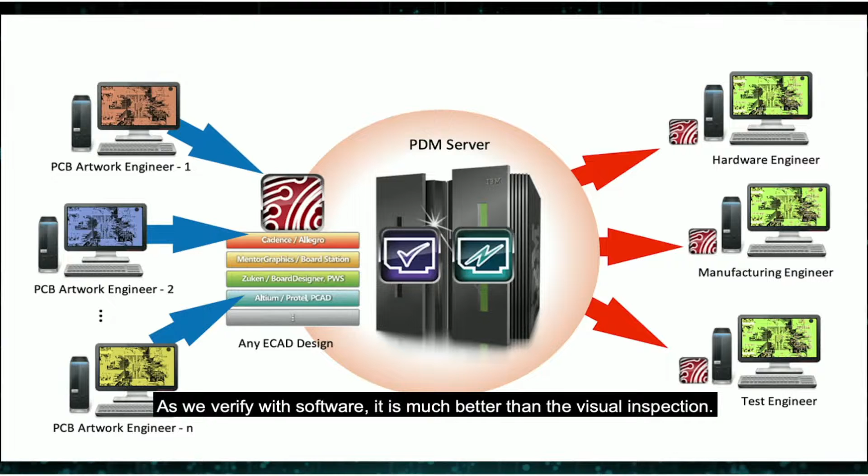그러다 보니까 재설계를 할 필요가 상당 부분 줄었고, 그 다음에 재제작까지 이루어지는 분야를 사전에 차단할 수 있어가지고 사실 개발 기간 그리고 제작비 거기에 효과를 많이 보고 있습니다.

빠른 대응, 그러니까 저희가 요구하는 아이템을 적기적소에 바로 제공해 줄 수 있고 저희가 요구하는 대로 수정해 줄 수 있고 그런 부분이 영향을 받았습니다.

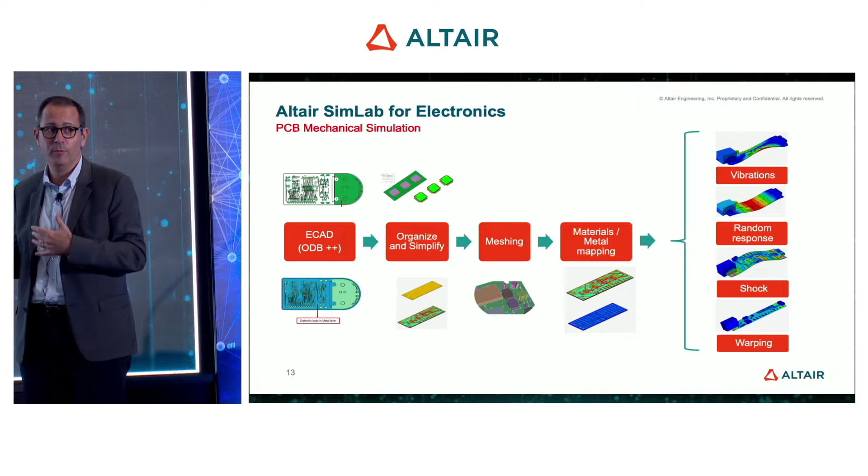But it's not only for the mechanical simulation. In SimLab for electronics, we can also do the system thermal analysis and the electronics thermal management, including external heating, component heating, and joule heating.

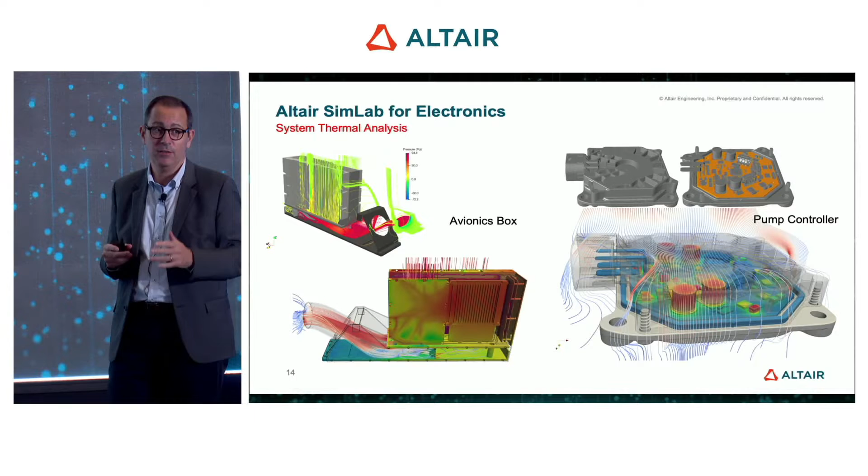And now we jump to the electrical engineers who are working on the design of the antennas, analyzing which is the best place to mount the antennas, also working on the simulation of a drive test or a flight test, working to analyze and mitigate interferences in electric vehicles, or analyzing the communication range in a system. There are also civilian and military organizations working on the management of the frequency spectrum.

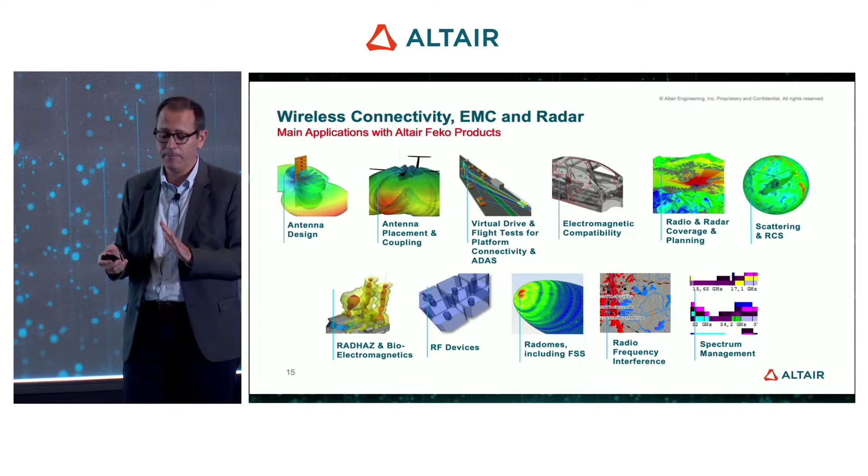From these applications, I would like to recall this use case related to antenna design and placement for Airbus, where basically they are using our simulation technology to ensure the antennas are sitting in the right positions, taking into account nearby equipment, but also constraints, for example, like maintenance.

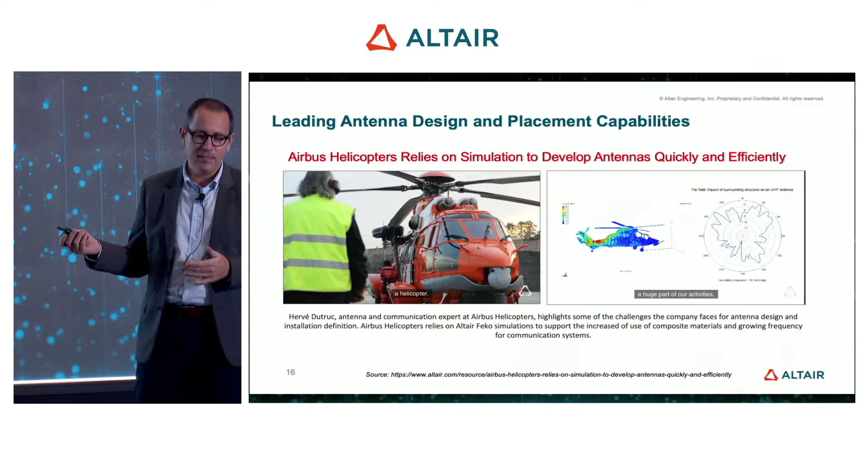And this is a very nice case, but now what's next with this? Here I would like to briefly talk about digital twins related to wireless connectivity, where the digital twin is helping to make decisions during the development phase, to optimize the product during its operation, and also to collect data that will be used afterwards to improve the product.

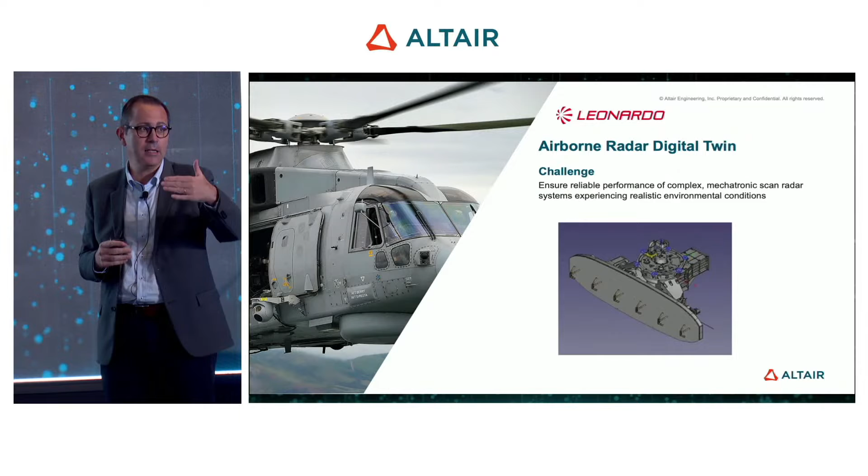And their goal is to ensure it will have a reliable performance. To do that, they need a digital twin, which emulates the real operation of the radar antenna when flying. And to do that, basically there are two parts.

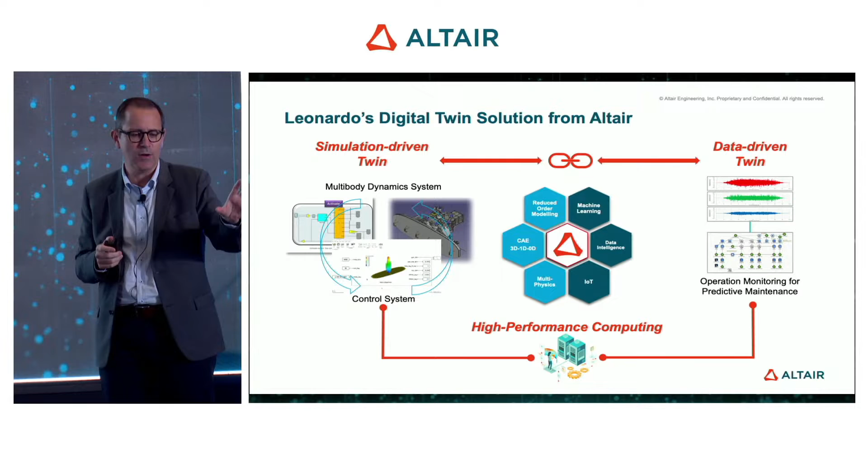And in order to do that, you really need a high-fidelity model where you need to include different physics with the different simulation tools that we have for antenna simulation, control, for electric motors, and for multi-body, to improve the performance of the product.

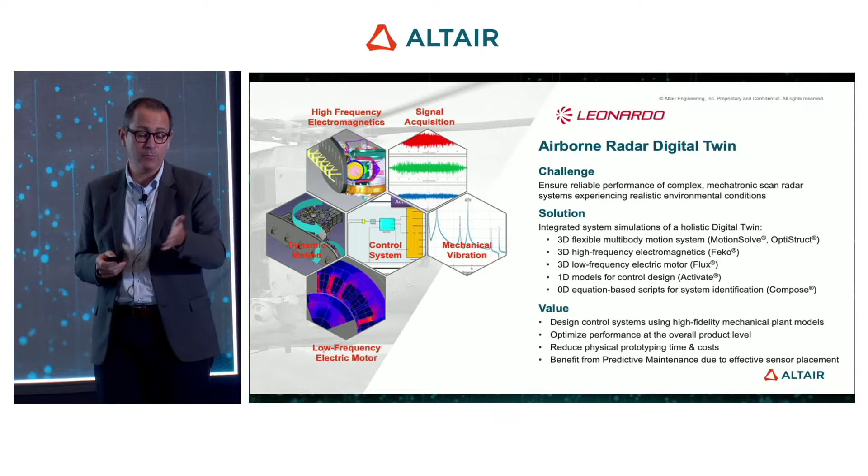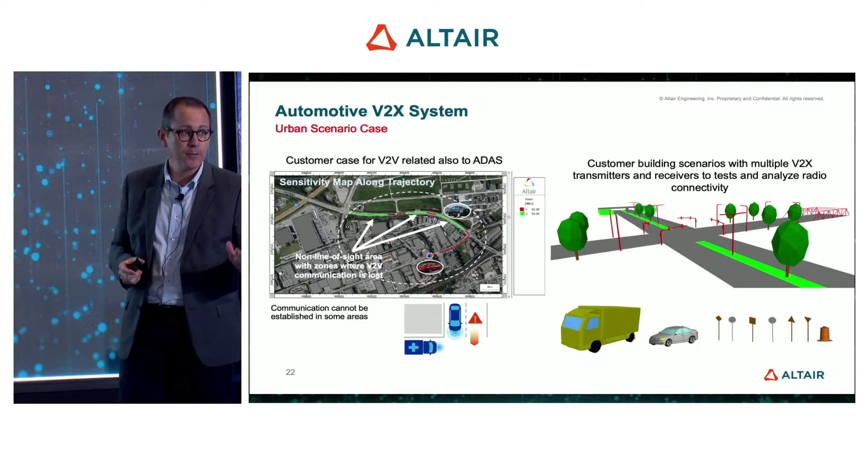And at the end, this is helping them to reduce the time they need to do all the prototyping and also the costs. And also, if we move to digital twins for automotive, we have many customers using our technologies

to analyze the connectivity between vehicles or between vehicles and infrastructure. And also this is related to ADAS and 5G, because for example, there is an interesting use case where you have cars approaching an intersection, and you need to ensure that they will communicate with each other to eventually slow down or stop the car.

And on the right, you can see something that we are now working on with several customers who want to create, with our technology, a digital twin of the scenarios that they are using to do this type of tests to communicate the vehicle with each other and also with the infrastructure.

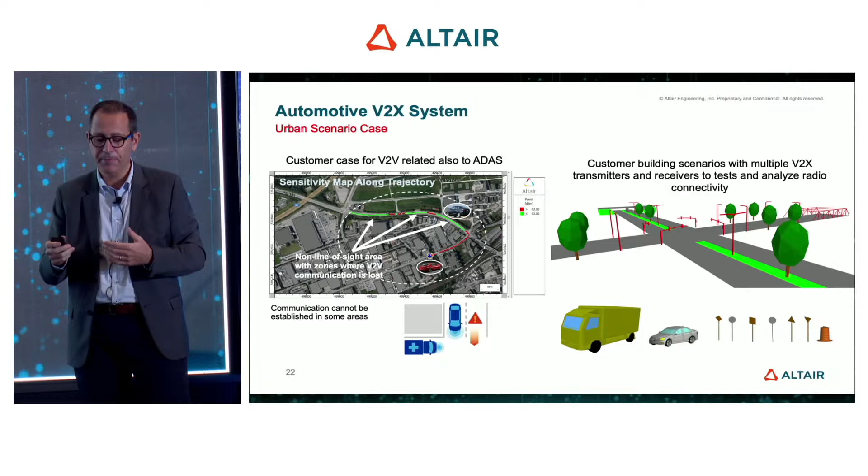And now I would like to jump to the last part of the presentation, where I would like to talk about the two most recent acquisitions. One is related to power electronics, because basically today modern electronics means power electronics and power converters. For example, you have to charge the battery, you need to convert AC to DC, or for example, for an electric vehicle, you need to convert DC to a three-phase AC, so for the electric motor. This is a sector which is growing, and it's a key part of electrification.

And this is one of the reasons why we acquired PowerSim out of the US earlier this year. Their flagship tool is PSIM, one of the leaders in the market, mainly for electric and industrial drives, used in automotive, aerospace, energy, and some others. And with this, we have been able to really strengthen the solution we have for electrification, which includes lightweighting, battery design, and also power electronics.

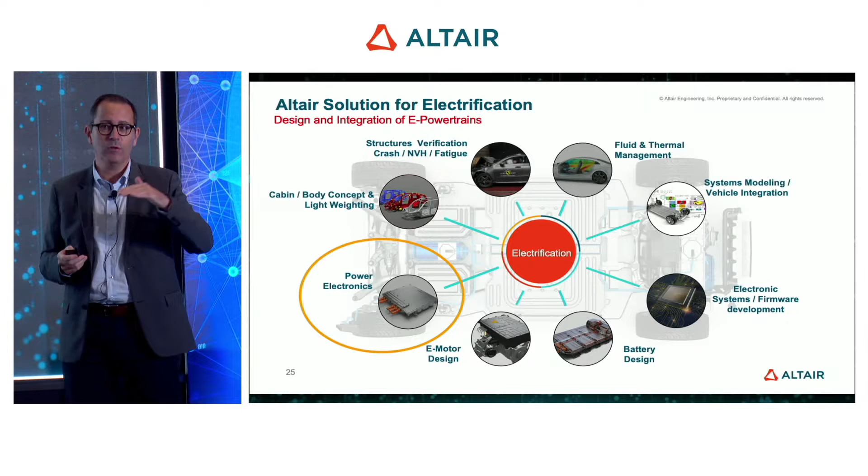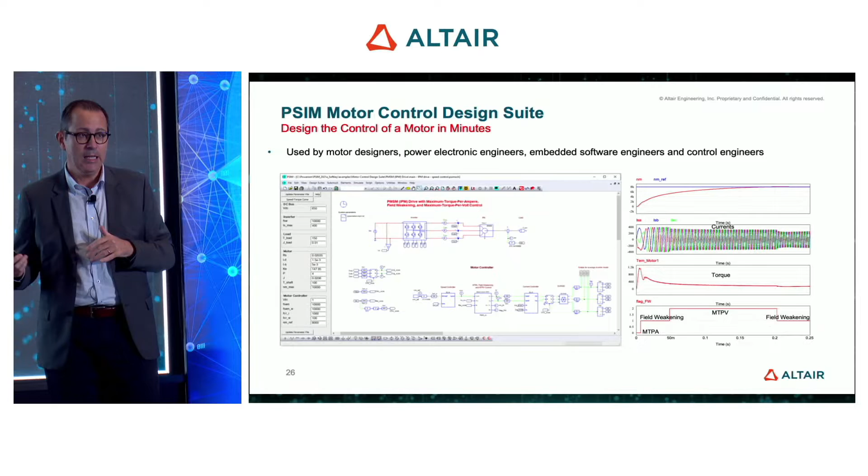And a bit more in detail, just to show you a couple of use cases. With PSIM, you can design the control of a motor in minutes, so it's really fast. This is used by the motor designers, the power electronic engineers working on the inverter, which is the device doing the power conversion, and also used by the embedded software engineers and control engineers. Eaton is one of the customers using PSIM to analyze the interactions between the devices and the motor as a part of the electric system.

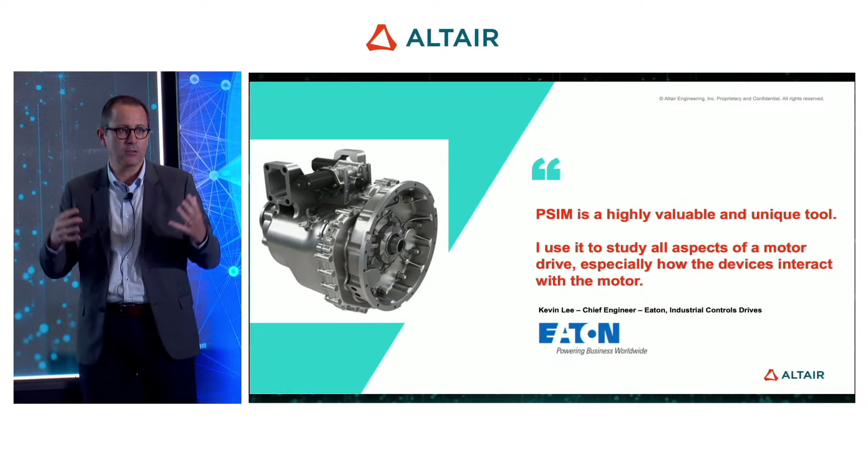And another use case is the creation of a system model of the whole powertrain of either the hybrid vehicle or the electric vehicle to analyze the system, and also where you can do some detailed design of some parts of the system, like, for example, with the electric motor.

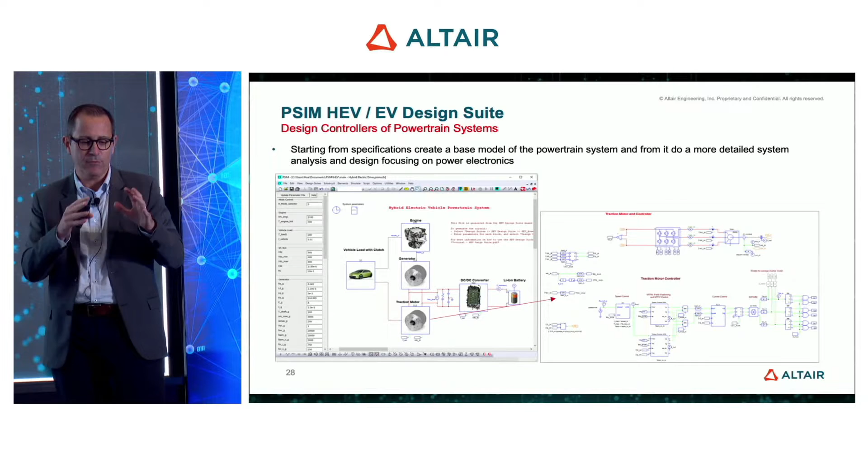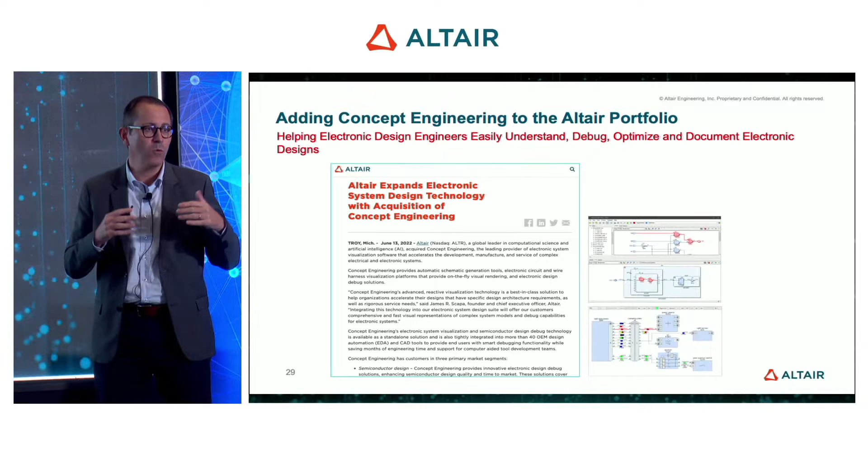And just the most recent acquisition is Concept Engineering. This is basically a company out of Germany with technology for visualization and debugging.

They are playing in 3 sectors: semiconductors, basically for silicon debugging, so to help with chip design. Also, they have a set of libraries to automatically generate schematics, and this is used by some EDA and CAD software vendors. And the last one is a visualization platform for complex electric systems.

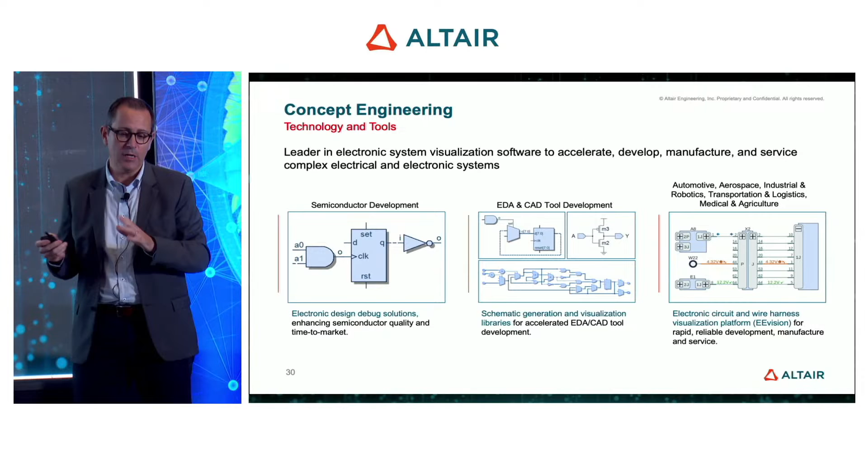This is called EEvision, where basically the idea is engineers and technicians are wasting many hours looking at and trying to find information in static documents. And with EEvision, they have now an online visualization and debugging platform where to quickly render cable harnesses, circuit schematics, and component attributes to enable a smart design exploration and documentation.

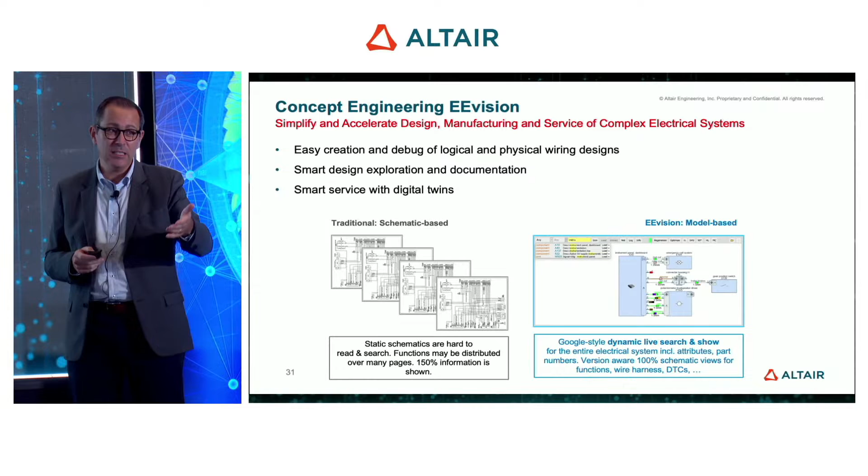And there are many companies from the transportation industry using the solution. One of them is NASA in the US, where basically they have replaced their manually created schematics, which they are also maintaining with EEvision, to reduce time for testing, design, and manufacturing. And also with EEvision, they have been able to have a faster and more reliable development process for these complex electronic systems.

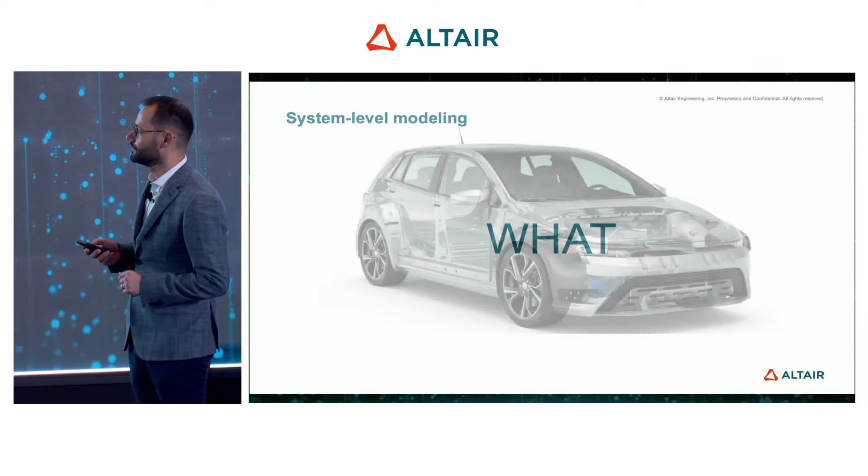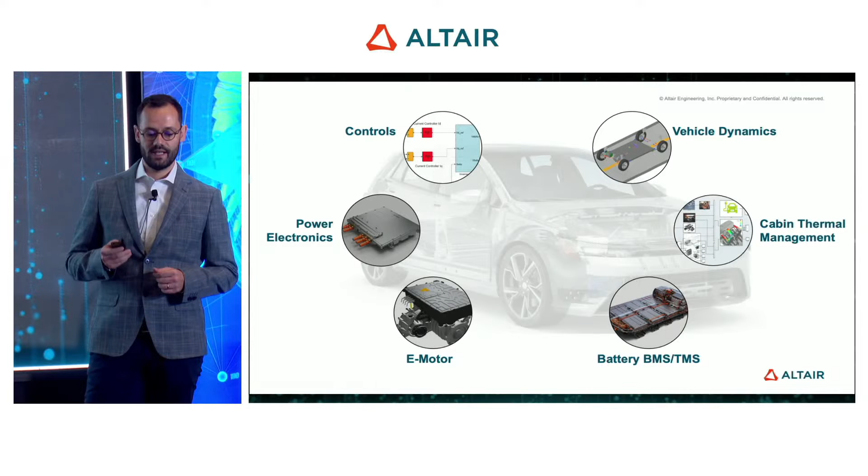Let's make an example. Let's consider an electric car. If we consider this complex system, we can identify different disciplines that are coupled together and interact: the control part, vehicle dynamics, cabin thermal management for passenger comfort, battery, BMS, TMS, e-motor, power electronics, and so on. With system modeling, we're able to model all these disciplines and also their interaction in the same modeling environment.

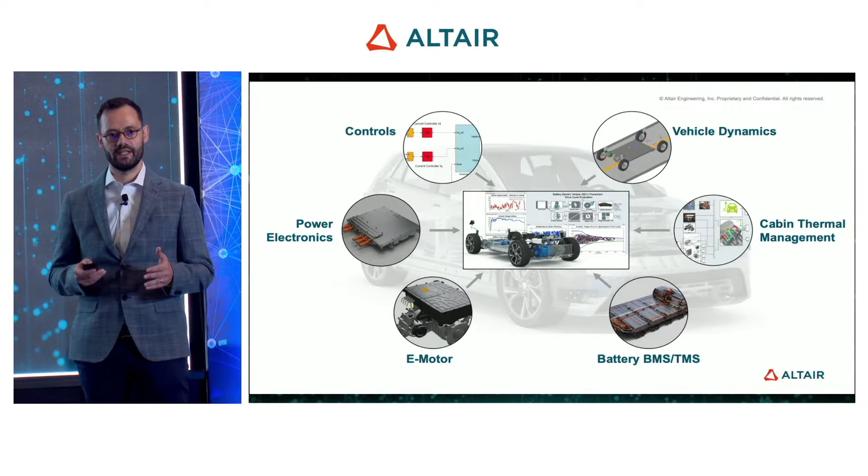Now, a good question is why we want to do that. There are three main reasons: one connected to the complexity of the problem, another connected to efficiency, and a third connected to collaboration.

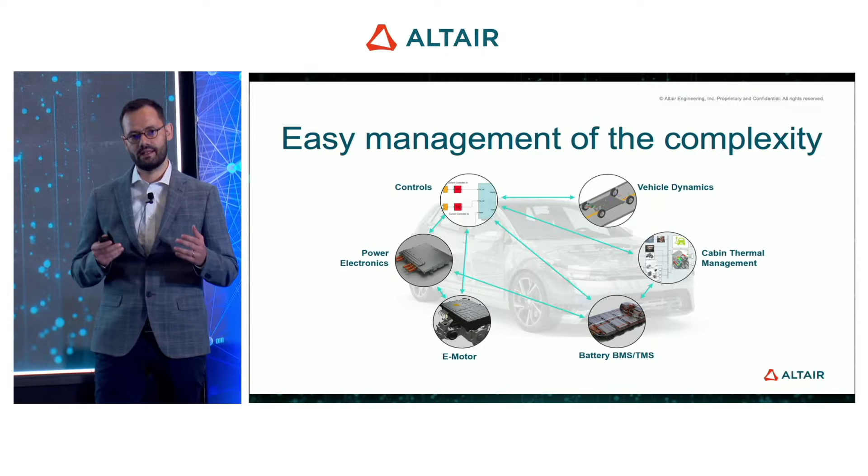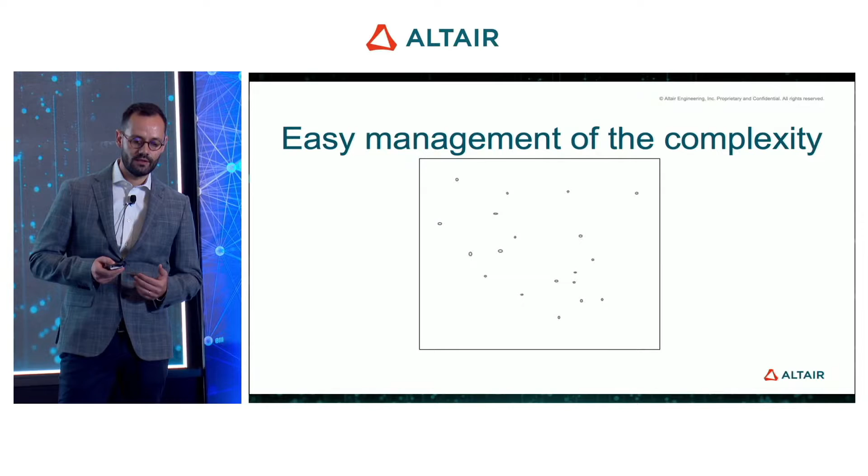Let's start with the first. System modeling helps to have an easy management of complexity, meaning we're able to handle the different disciplines and their interaction. This is very important because in a fuzzy situation where we have different disciplines, thanks to system modeling we can find the interaction among them, understanding better how our system made of different subsystems is organized. This allows a comprehensive understanding of the full system.

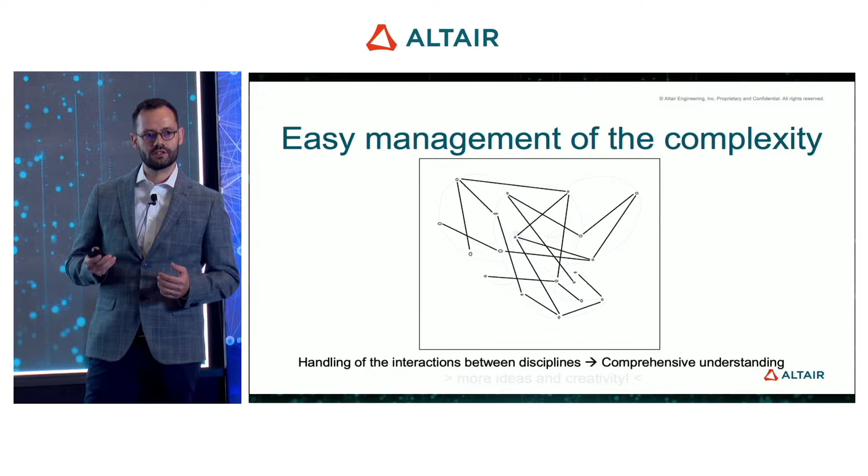This means also understanding the factors that are mostly affecting our phenomena. Why is this important? Because it can enable and help generate more ideas, and also help have more creativity. I have found my own Ganesh winking at me in the dots, okay? But maybe this is too much creativity.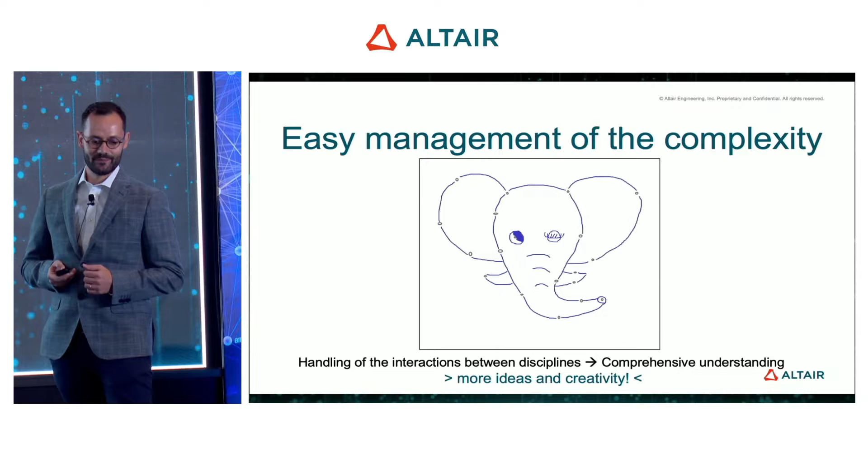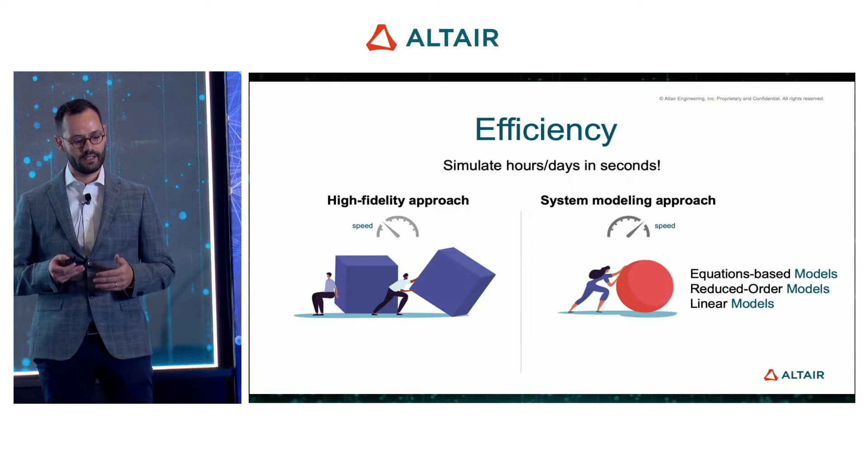Now let's switch to the other topic, efficiency. With system modeling, we can simulate hours or days in seconds. This is because system modeling usually uses equation-based models, reduced order models, or linear models. To dive a bit more into the math, with high-fidelity models we deal with finite element tools, so we need to solve partial differential equations. While with system modeling simulation, we need to solve ordinary differential equations or differential algebraic equations, which are much easier and faster to solve.

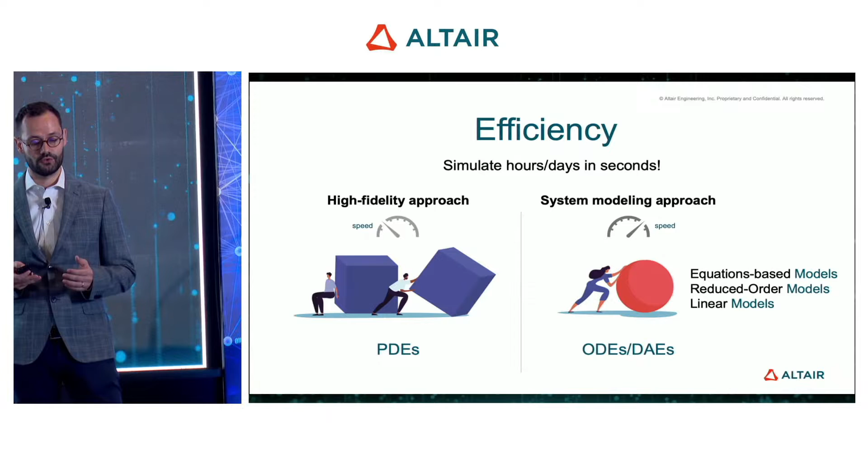The other main reason system modeling is important is connected to collaboration. As I explained, system modeling helps model each discipline and their interaction. Each discipline means different departments inside the company take care of these disciplines, and because we're able to model the interaction, we're able to break the silos in our organization. This enables a more integrated ecosystem environment, not just in terms of modeling, but also in terms of teams working on these different subsystems. This is very important and convenient.

Now, how can we adopt this kind of approach? Let me share a classification connected to the type of language we use in system modeling. We're able to apply this approach by leveraging the script-based approach, the block-based approach (the graphical approach), and the 3D approach, which is able to consider accurate geometry, the CAD system of our system. There is a language that is more suited for specific disciplines.

Let's think about control, for instance - in that case we need to use a block-based approach. But the capability to have all these languages available is really convenient when we want to use a purpose-driven modeling approach, because with this capability we can model different disciplines with different levels of fidelity.

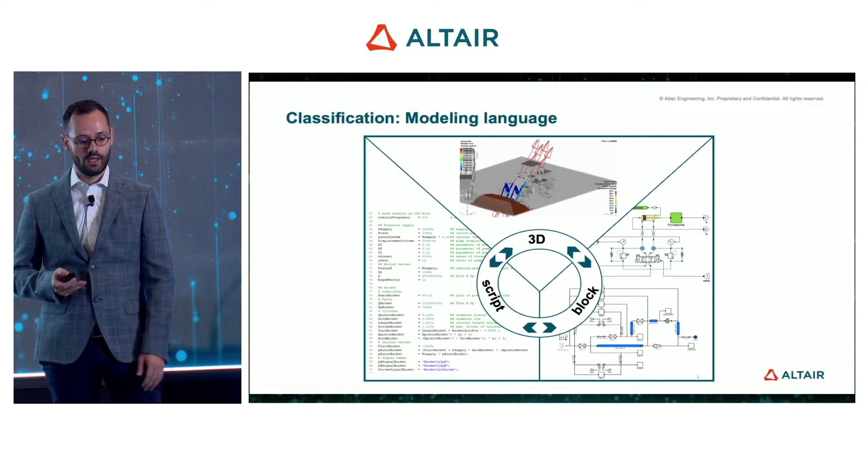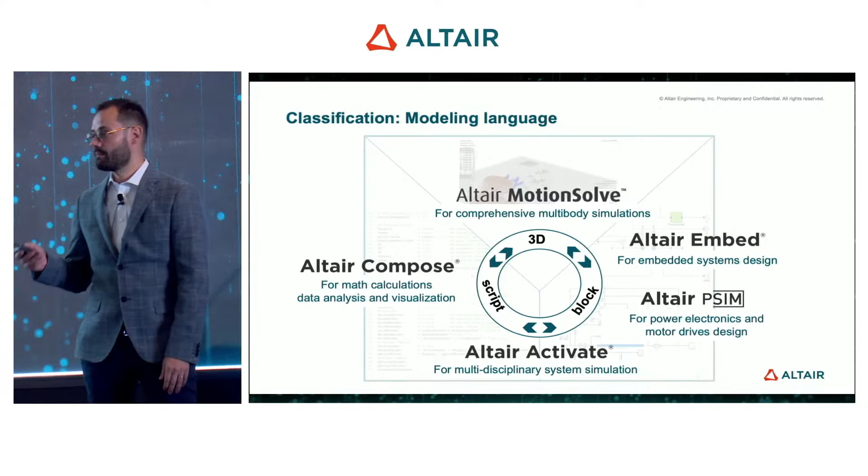Let's think about multi-body simulation, for instance. I can start with equations using the scripting approach, then proceed with a block-based approach using Modelica, and then even consider the CAD geometry of the system with all the flexibilities in the different components. So we can have a really advanced simulation. In Altair, we have many tools that take care of this language in the system modeling portfolio we offer, represented here in a circle because they are all integrated.

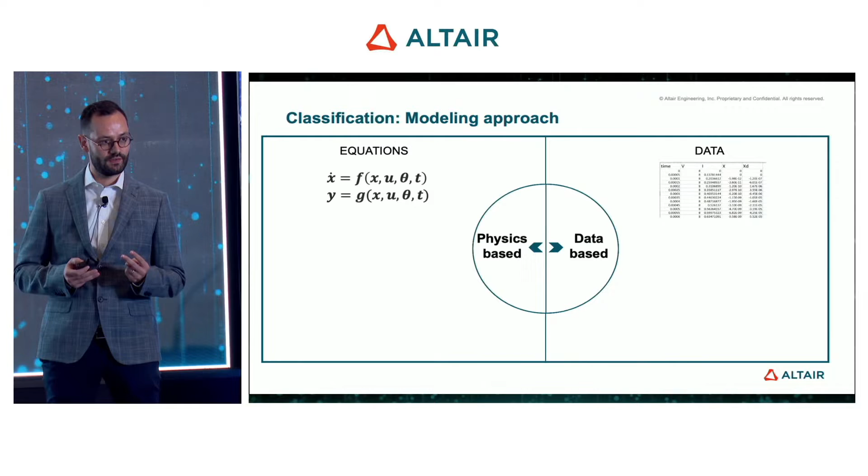Let's classify system modeling considering the approach that we use. There are two main types of system modeling approach: the physics-based and the data-based approach. The physics-based approach relies on equations. The data-based approach relies on data.

In the equations-based approach, we need to deal with the equations, so basically we use a white box approach. In the data-based approach, instead, we apply machine learning in order to identify the relation that we have among the data, so to find a model able to represent the behavior hidden in the data. This is a black box approach.

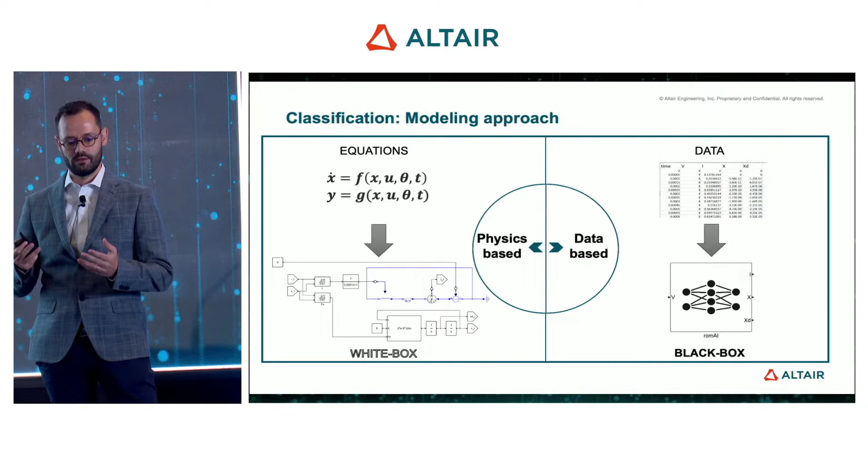The two types of approach are different also in terms of the steps we need to follow when we want to apply them. If we consider the physics-based approach, we need to start with the system observation. Then we need to make some assumptions, some approximations on the system. Then we need to start dealing with the equations, so to really start performing the modeling of the system. And then, of course, there is also the analysis of the results.

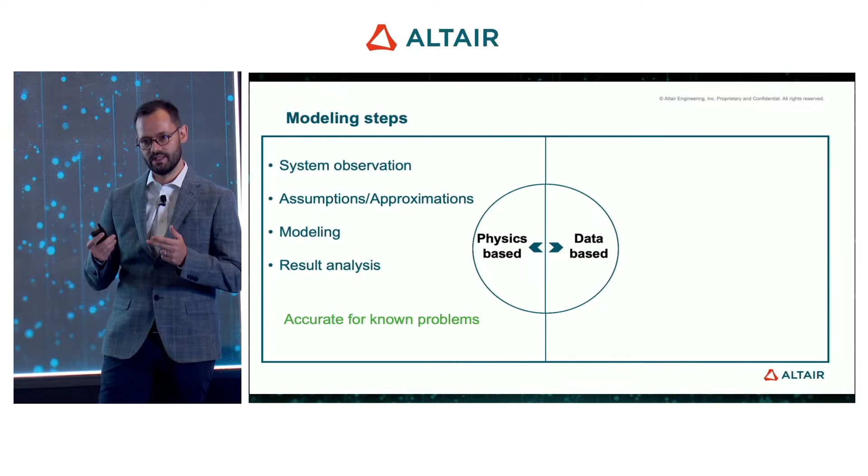This approach is accurate when we deal with known problems, so when the equations are available and accurate to describe the phenomena that we want to model.

Then we have the data-based approach. The first step is the same, so we need to observe what we want to model. But then there is a step that is different: the data preparation. So we need to understand which data are needed, and we often need to process them before using them directly in the machine learning algorithm.

In this case, instead of modeling, we have the training. So we need to apply a machine learning technique in order to train our model, and then, of course, we can visualize the results and analyze them. This kind of approach, since we do not deal directly with the equations, can be more accurate for unknown problems, and can even be faster to implement because we don't waste time modeling the equations. But of course, this is not always suited.

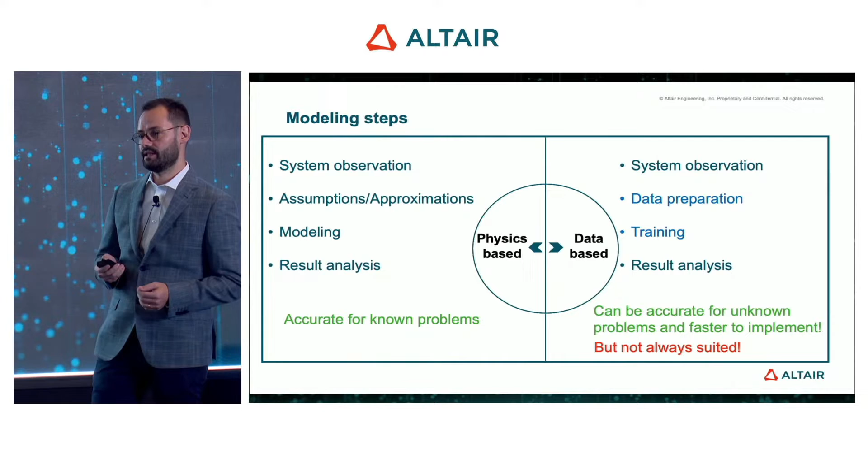Now let's make an example here. In this example, I want to show the combination of these two approaches, physics-based and data-based, on a system that is a wheel loader. And this, as you can imagine, is a really complex system with different disciplines that are involved.

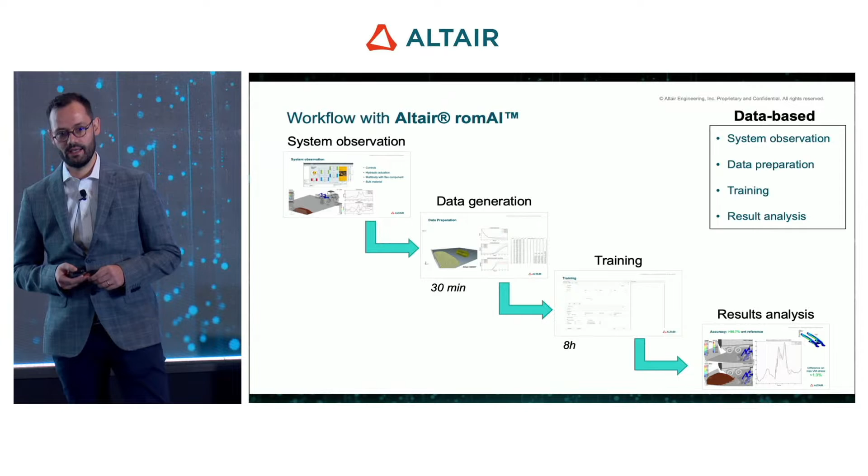For this kind of example, I will also present briefly an app called RomAI. It is an app based on artificial intelligence that is helping us generate reduced order models. We start with the first step, the system observation. In this case, we want to take care of these disciplines: control, hydraulic actuation, multi-body dynamics with flexible components, and bulk material, that is the handling of the ground basically.

If we observe this system that is really complex, with different physics that interact, we can observe that the handling of the bulk material is time-consuming, because it is a very accurate simulation with many degrees of freedom that we need to solve. So basically, this is also the bottleneck of this simulation.

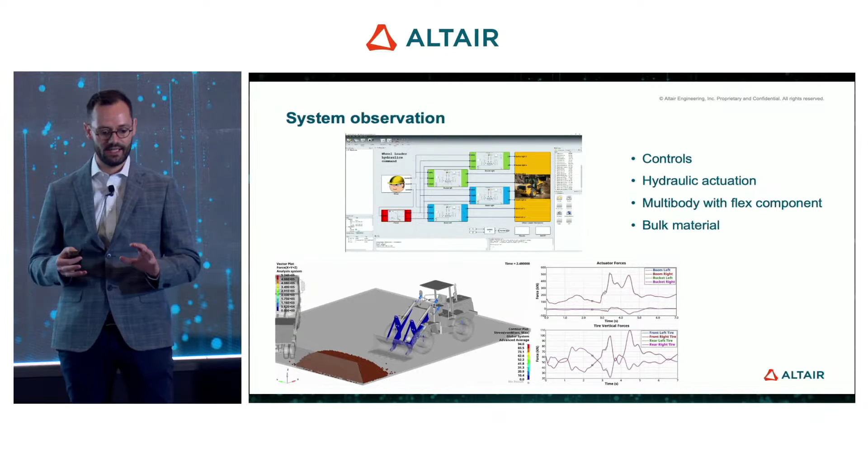So the idea here is to speed up this part, these disciplines, by creating a reduced order model of this subsystem, and then using it in the full simulation.

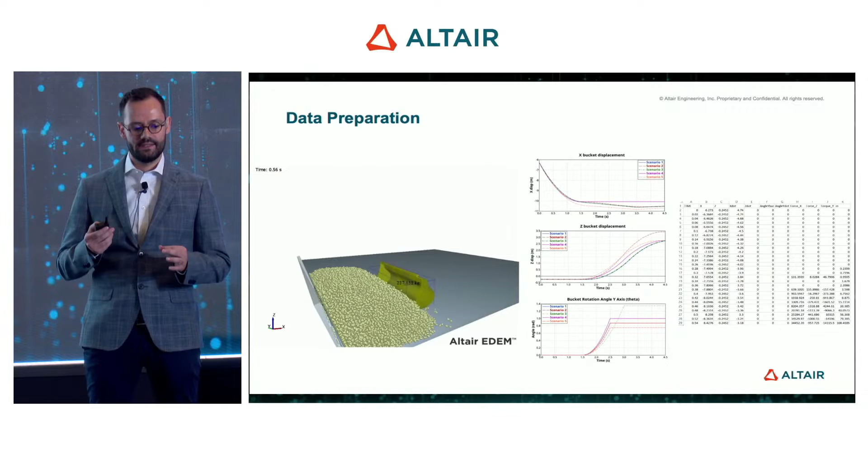So the next step is to focus on the bulk material handling, basically running a few transient simulations, where we obtain the data needed to generate a dynamic reduced order model that is able to estimate the interaction forces between the ground and the bucket. Once we run this simulation, we can reuse the data in our RomAI GUI that you can see here.

In summary, we can define here our inputs, our outputs, the state of the system, without any need of code—it's all done through the GUI. We can define a certain dimension for the neural network that we want to use to represent this model, and then run the training of this reduced order model.

Once we do that, if you go all the way to the end, we generate the model. We can even directly estimate the accuracy of this simulation, so we can evaluate how accurate our reduced order model is before using it in a system level simulation.

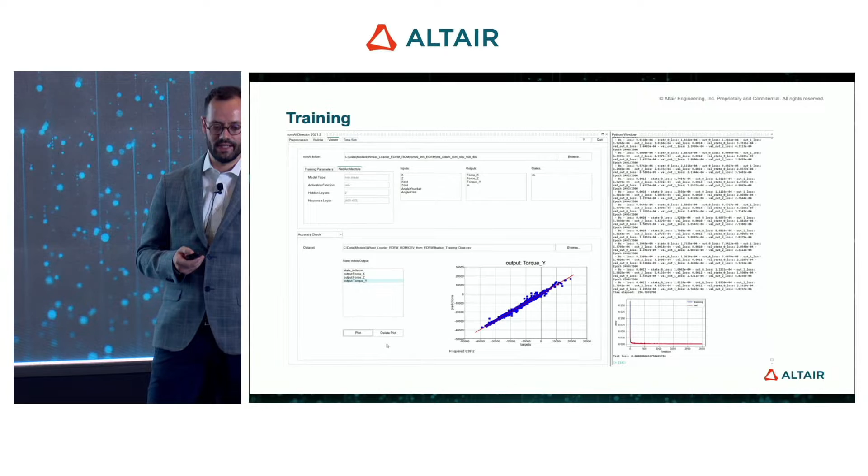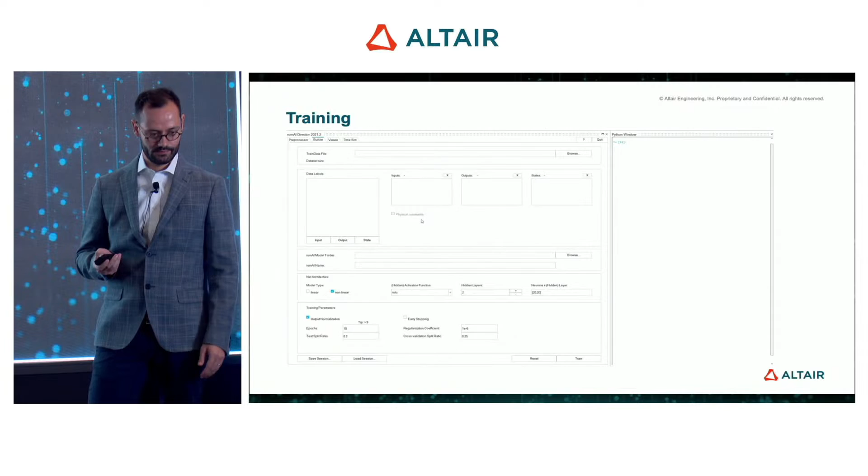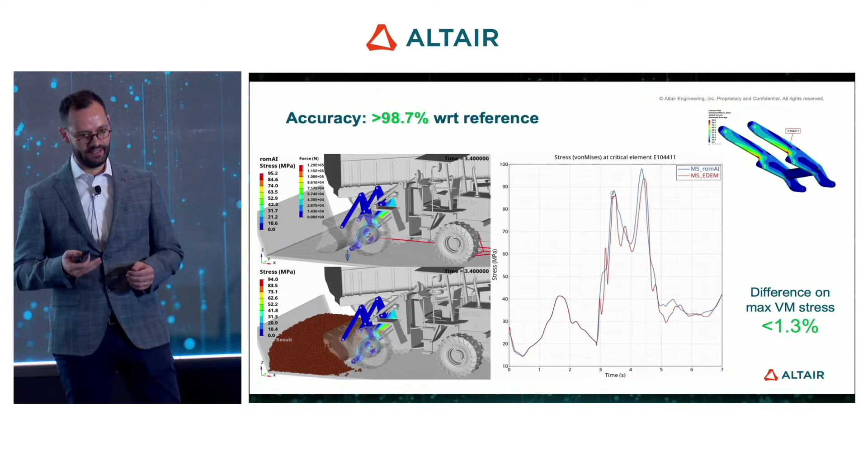In the bottom left, instead, there is the original simulation. By using the reduced order model, if we look at the chart on the right, where we represent the von Mises stress at the most critical point of the boom, we can see that the accuracy is still really high—higher than 98%.

What is the advantage? Now the simulation with the reduced order model takes 20 seconds to run, while the original one was taking 680 seconds. So basically we have a gain factor in runtime of 34.

You can understand the advantage now when we need to run, for instance, an optimization. Let's say we want to optimize the shape of the boom, or the control system, or the hydraulic system—you can understand the big advantage we have following this approach.